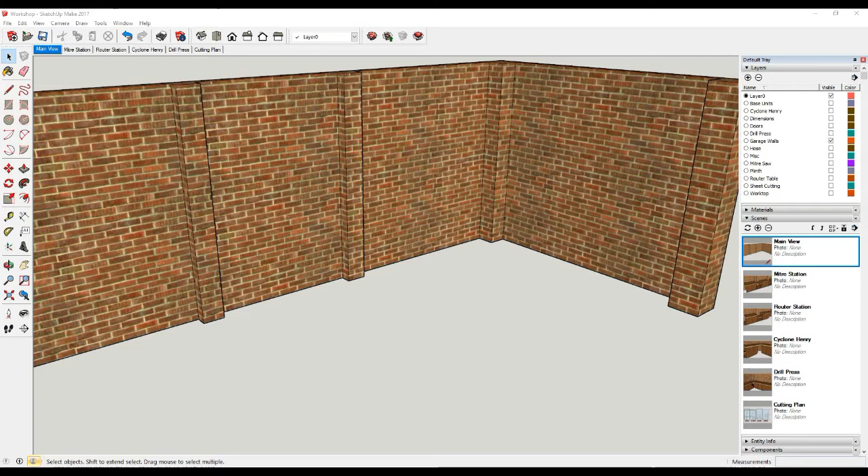First of all, we're going to be making all of our own base units and worktops for the new workshop. We're going to start off with double base units, similar construction to kitchen base units. They're all going to be constructed from 3/4 inch plywood. Each unit will have adjustable feet because the existing garage floor is very uneven. Doors are also going to be made from the same 3/4 inch plywood panels, and they're going to have soft

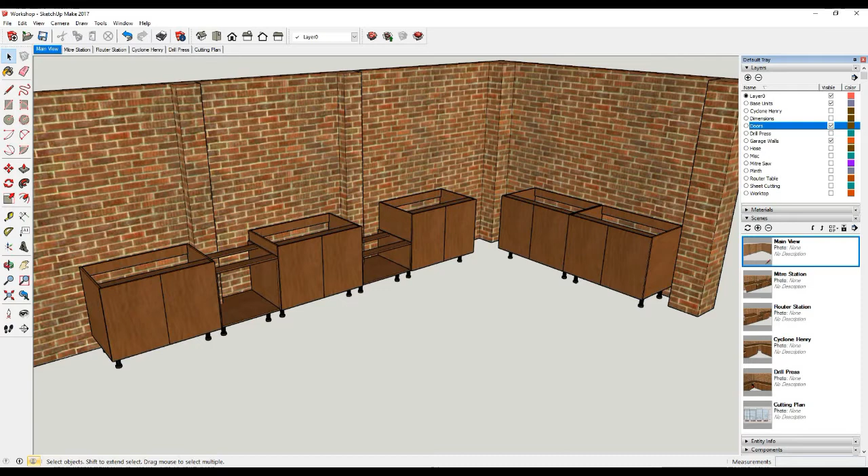close hinges. For the worktops, I've taken inspiration from one of Norm Abram's videos where he built his new mitre station for his workshop. It's going to be a sandwich construction. Primarily it's a 2x4 timber laid on its side with half lap joints to build a really sturdy framework, and then on top of that, that's going to be covered with a 3/4 inch plywood sheet, and then on top of that it's going to have a 4mm hardboard to give us a nice smooth level surface to work on.

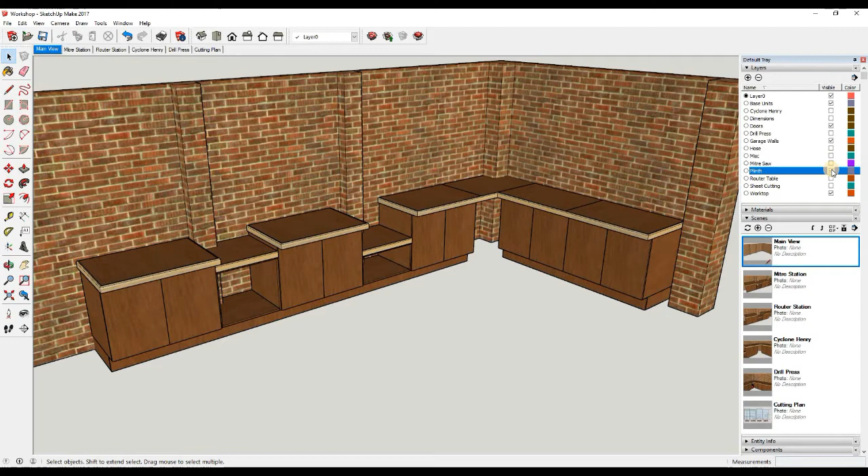Also, if the hardboard ever gets damaged, we can always easily remove that, replace it with a new sheet fairly inexpensively, give us a nice clean surface. Then to finish it off, we're going to fit a kickboard underneath all of the units to enclose all of the legs, just to give it a nice tidy clean appearance and stop any tools rolling underneath the cupboards and to keep the dirt and dust out.

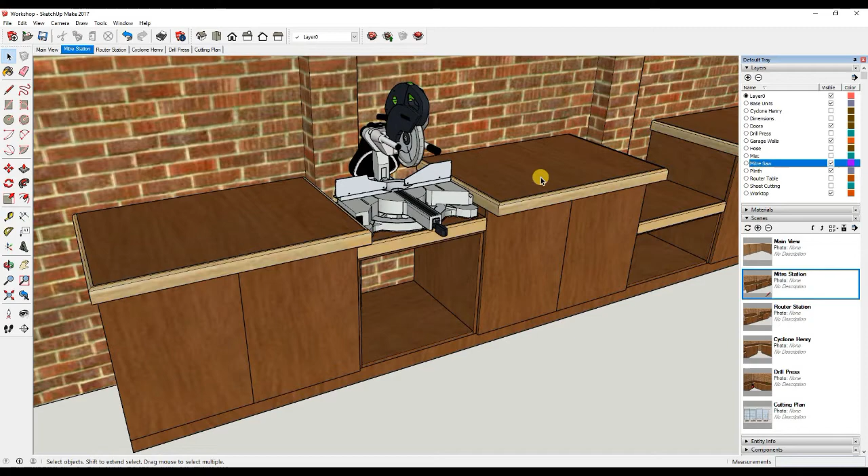In between these double base units, we're going to make some smaller cabinets which will support the tools. In this first gap between these two units here, this is where we're going to put the mitre saw. We're going to set this little unit down exactly the depth of the mitre saw, so that the top of the mitre saw is flush with the top of the work surface on either side. This way we can run long pieces of timber through the mitre saw, completely supported either side.

In this next smaller cabinet, this is going to support the router table, and exactly the same, we're going to set the level of this lower work surface exactly the depth of the router table, so that the table is flush with the double base unit worktops again, so we could run longer timber or longer boards across the table and again have an in feed and out feed table.

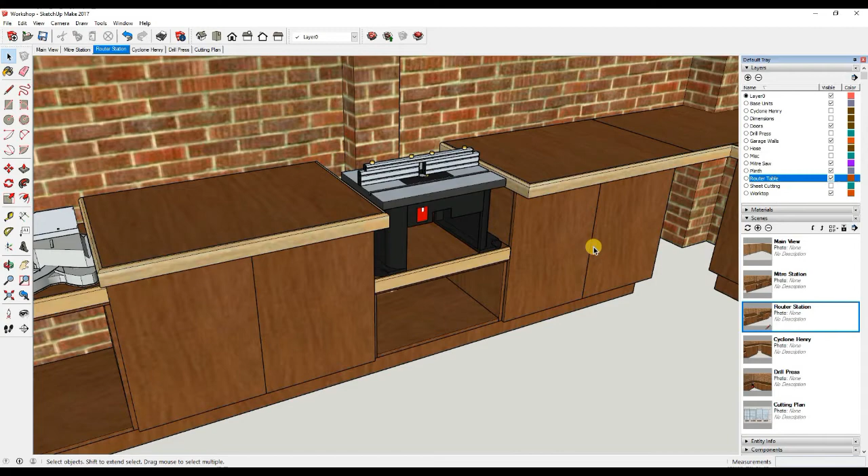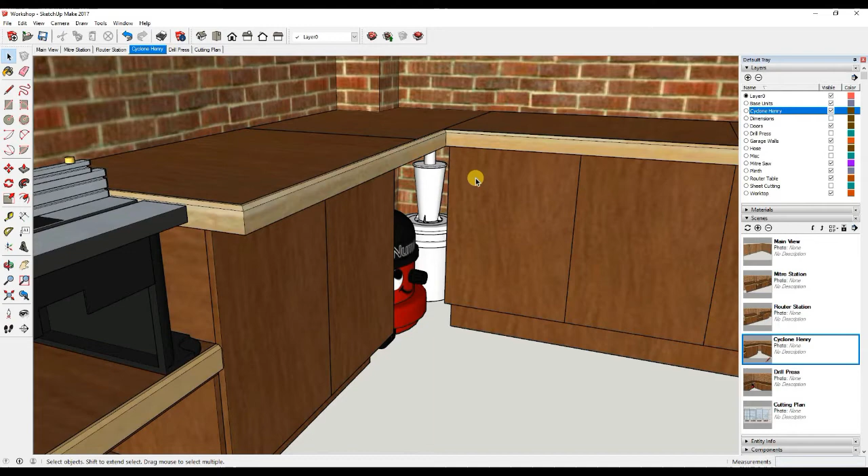In the corner of the workshop, in this space in between these two double base units, is where we're going to put the dust extract system. We've got our shop vac, which is linked to a cyclone and our collection bucket, and there's just enough space in this little corner to house these two. We're going to make this section of the worktop removable, so it can just be easily lifted out when we want to change the bucket, empty the sawdust, and that can be easily done.

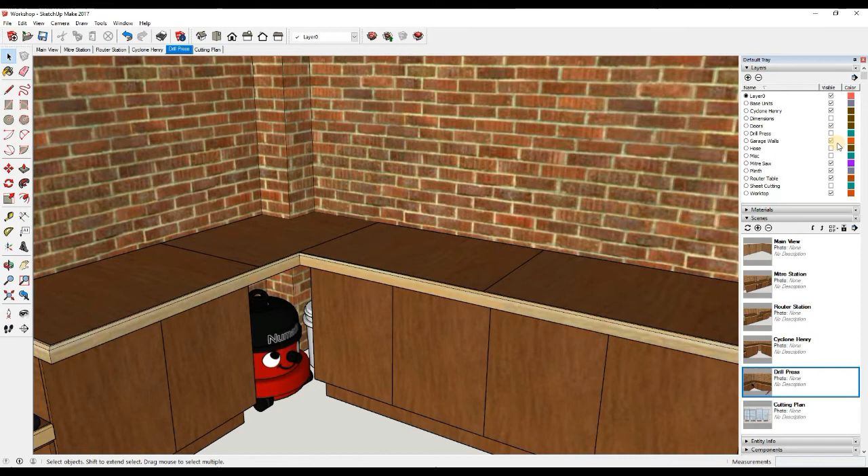Finally, on this right hand side of the workshop, on these base units, is where we're going to house the drill press and probably our small bandsaw. So there we have it, the complete plans for the remodel of the workshop. I'm really excited to get started on the build, and we're going to be videoing the whole process stage by stage, walking you through the construction of the base units, the worktops, and the installation of all the cabinets within the shop. So we look forward to having you along with us.